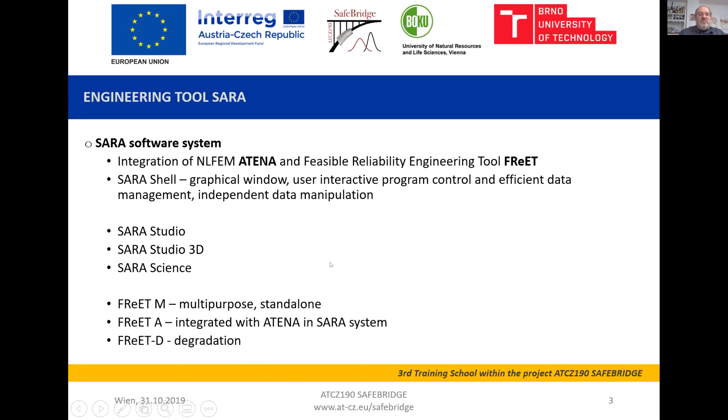So the main features of the SARA system are relatively friendly and simple-to-use integration, represented by the SARA Studio, of nonlinearity in civil engineering concrete structures, covered by ATENA, and advanced stochastic methods, concentrated in FReET. It enables us to account for randomness and uncertainty in the inputs for nonlinear calculation.

If we are using just ATENA itself, as I mentioned yesterday, we are in principle using deterministic calculation, and often our input parameters are only judged, so we are not sure about their quality, or they are in principle of random nature. But in deterministic analysis, we are not able to take this into account completely. We can maybe only set some limits like mean values or design values, but we don't have any idea about the stochastics or quality of the result. And therefore, the system should add exactly this dimension to the calculation.

The principle is randomization of input parameters. It is focused mainly on material, especially concrete properties, and the correlation among them. It could be used at the level of so-called random variables, which is the basic level that generates multiple samples. And each sample itself has clearly defined particular material properties or parameters.

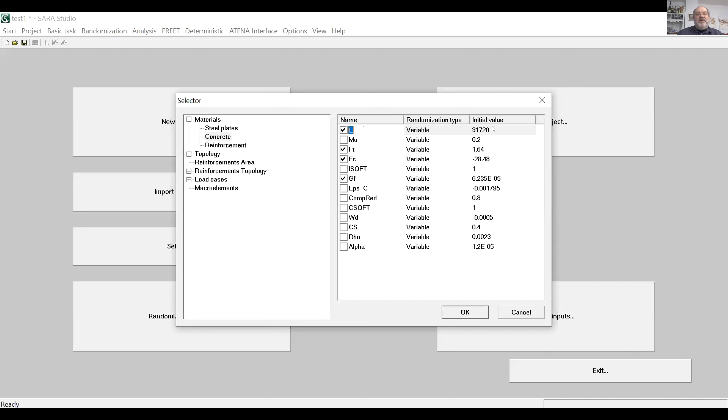And now, just for information, if you click on this variable, it could be changed to field, which will make the representation as random field. There are some more necessary actions, so I don't do it just now. I will return probably later if we have still time to show how to handle it. So at the moment, you have just to be careful to keep here everywhere variable, and you can already see on the right column the initial value, which is taken from the model. If you remember, probably you don't remember, but it was there in the basic task which we imported in this one, and will be used in FReET predefined as mean value. And you can see the list here on the right hand side. And if we confirm it now, we can start the randomization.

We have in principle two options: randomize materials or randomize the whole inputs. As soon as we randomized in the selector only the materials, all the others are switched off. If you take a look, there is nothing clicked. So as soon as you are limited to the randomization of materials, you can do this randomize materials. As soon as you do also randomization of something else, you have to use randomize inputs, which is not the same procedure. In this case, it's only update of materials. In this case, the complete input file is changed and randomized, which could bring sometimes certain problems. So this method of randomizing materials is more reliable, therefore should be used preferably if you randomize only materials.

So if we start the randomize materials, you will see now the screen of FReET. I am not pretty sure if you remember the demonstration of FReET software, which has been done by Professor Novák approximately 1 year ago. So I will probably repeat at least some basic information. So this is the main graphical screen, some alphanumerical table, and the tree of functions. And we have there at the moment active the random variables.

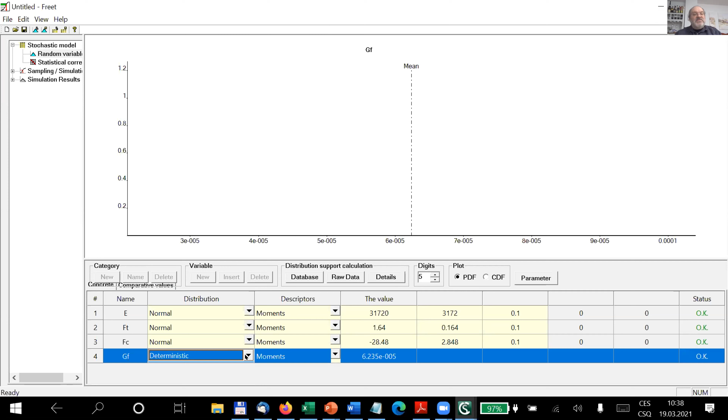The most simple way is to use the Gaussian normal distribution, but eventually we can use log normal, Weibull, or you can see here plenty of other distributions available depending on what you have, and eventually even you can use some kind of raw data and create a histogram distribution based on histogram. But as a basic, I will now employ the normal distribution.

This could be defined in different ways: by the mean value and coefficient of variation, or by some kind of extended parameters, or a combination of both, but the typical definition is by the moments.

The mean value could be changed eventually, but assuming our basic task has been created with the mean value, we will keep it. Only what we have to set up is the variability.

For modulus of elasticity, the variability as a default is 10% everywhere, and we can change it now to 5%. The tensile strength is rather unsure and variable, so we can put 15%. For compressive strength we can keep 10%, and for GF we could give something similar to tensile, like 12 or 20.

So now we have distributions, you can check a little bit what we did. For example, if we take the tensile strength, we have the mean value about 1.6 and something, but generated values will range approximately from 1 megapascal to over 2 megapascal. There will be several samples made in this region, similarly for all the other variables.

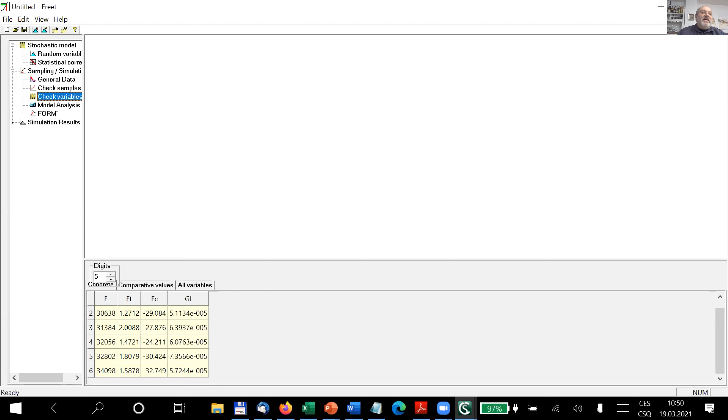As the next step is the model analysis. So if we go there, we are asked about starting model analysis, and if you do this function within the standard FReET, your functions which have been defined within FReET directly will be evaluated.

In case of SARA, it means that our samples will be generated. They will be collected somewhere in our directory, which has been created for our project, and will be started then by ATENA analysis. So now actually the samples should be generated.

There are these green squares, or green objects, which are the 6 samples, and now we can calculate them.

We can calculate them within the SARA system or outside. I hope I can show it on the screen. Do you see now my total commander? Does it work like this? Do you see the total commander? Yes, okay very well. So we have here in SARA the project which we created.

It was this test2, and here you can see the files task 1 to task 6, which are just input files for ATENA, and I can run them directly here as independent ATENA tasks, or even distribute them along, let's say, all computers in my laboratory and then collect the results.

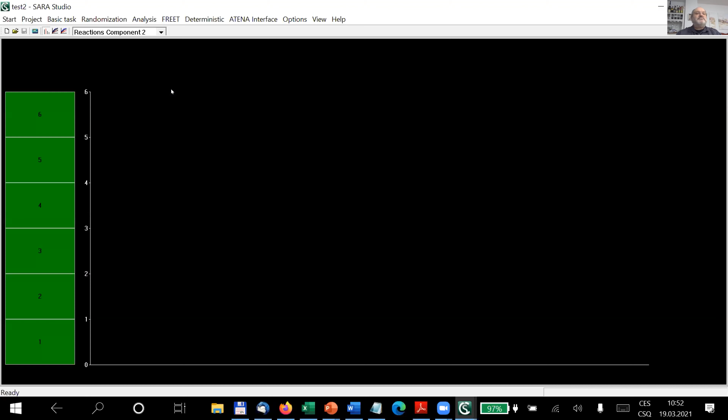So this is rather practical, but if we can go directly from SARA Studio, I will switch back to SARA Studio. Now I can go to the field analysis. It's not anymore this large scale buttons available, so we have to continue with the pull down menus, run analysis. And I can select either all of them or just some selected ones.

And if I start it, it will start the ATENA calculation in sequential way. So first of all, for the first task, I can follow it. I can see the load displacement diagram eventually if I would like to have it.

So displacement on the first axis, reaction on the second one, and this is our load displacement diagram. And eventually I can see also what happened with the model. So like this, I can enlarge everything, and we can see what happened in the analysis already during the calculation.

And now we are at the maximum. We have the failure, and our maximum in this case is about 90 kilonewton capacity of the reaction of the loading force actually. And now we have several more steps on the descending branch, and then okay, I leave it now.

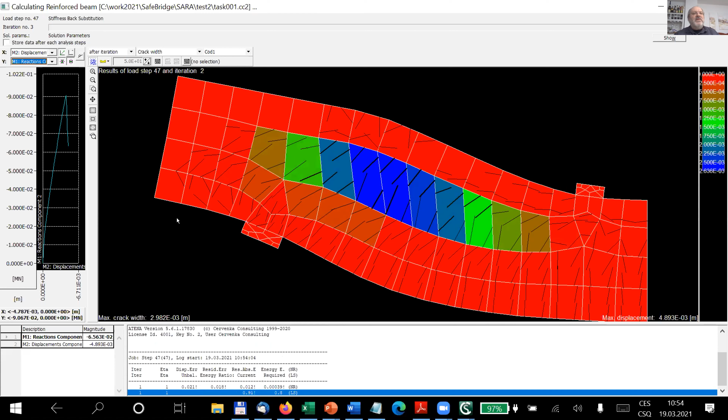Maybe I will switch off the graphics in order to a little bit increase the efficiency of calculation, since the graphics is taking certain capacity of the computer. And we have to have there a sufficient number of load steps even after peak, because the particular samples could have a little bit higher capacity than the original example, and we have to have still enough steps in order to go up to the maximum.

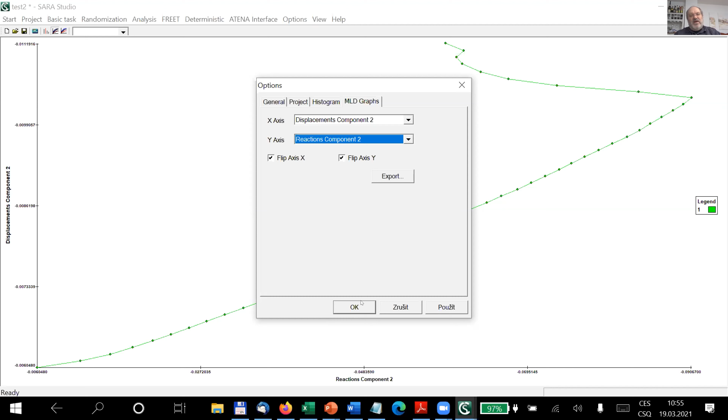And now the results will be the reaction component, which is actually our resistance, and will be combined here in some kind of relatively coarse histogram. But also we can see the load displacement curves, where we can set up the axis in options and MLD graphs, multi-load displacement diagrams, where we select displacement component on the x-axis and the reaction component on the y-axis. We can flip the axis because the values are in general negative in the definition, because we have the loading and the reaction going against the axis.

And we can switch back to the histograms, where we have now these two values, and we will see how the other samples will fit in this part. We can also set up here the scale of the axis, again in options and histogram, and we can select here automatic setup of the axis, and we can also select which one from the monitoring points would be evaluated. This is the important thing I mentioned yesterday.

It is decisive for SARA which values we set to the monitor, because the monitors are automatically transferred to SARA and later on also to FReET. And we have here two monitors, displacement component and reaction component, which represents actually the force which acts on our beam from the top as a reaction to the prescribed deformation. So the reaction component will represent actually the carrying capacity. So our setting is okay. We can leave the automatic setup, and we can take a look at the load displacement diagrams.

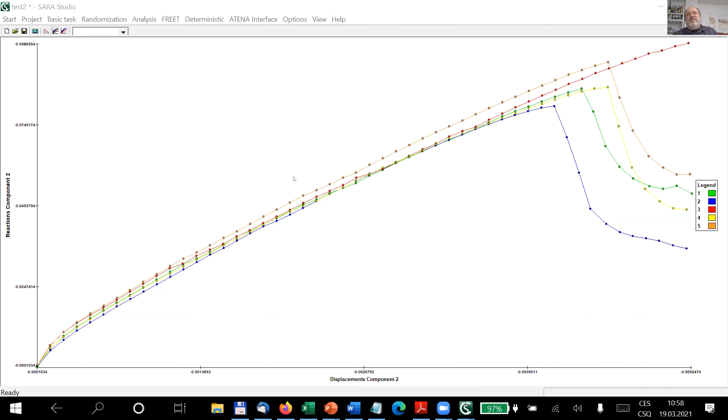And we will have to wait shortly until all the samples are calculated, because for the evaluation in FReET, we need to have all results. Otherwise, the stochastics will not be representative. So we can check again how far the calculation number 5 is. So it's just finished, and it's added to the set. Number 5 is the orange one, and now it's going to number 6. So in some minutes we have all of them. You can see if we keep the graphics off and the finite element mesh is rather coarse, the calculation is going fast.

But as soon as you make this kind of analysis of some complex example, it can take even days or weeks until you calculate, if you have 30 or even more samples, until you collect all the results. Therefore, it is meaningful to distribute the particular samples or particular files in parallel over several computers and collect the results.

The results you can collect in the analysis. First of all, you can break the analysis using this finish command, or you can also import the whole task or just the monitors, depending on whether you do it in the local or some extensive network. So you import the results from other computers directly to the SARA system.

And now we have our 6 samples ready. So we see here the load displacement diagram, and we see here also the coarse histogram of the results. So number 6 is somewhere in the middle, and the others are around. So it's some kind of very coarse normal distribution, let's say. And now we can go to evaluation.

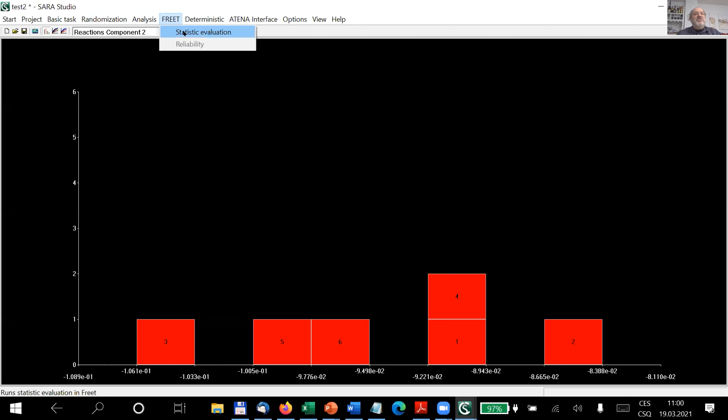So we go to FReET, which is the next tree, before we used this pull-down menu analysis. And the next one is menu FReET, which shows the statistical evaluation of the results. So now we are back in FReET, and we can go to the last position, before we managed this sampling from the beginning, where we defined and checked the data, and then did this model analysis. And now we go to the last position, which is simulation results, and we can see as a first point the histogram, for both reaction components and the displacement components for both monitors.

And we can set up here the number of classes, and what we see is the mean value and variability. So the mean value of our resistance is about 94 kilonewton, 0.094 in meganewton, and variability is about 7%. So variability of our inputs was, let's say, between 5 and 20%, and the result is about 7.

So we can exactly check this sensitivity, and we can see, if we relate the particular input variables to the reaction component, that the largest sensitivity is for tensile strength, which we could somehow expect, almost 80%. And you can see again, I will switch on the numbering to see it better, for which example which value has been achieved. So there is a certain strong correlation between tensile strength and the resulting resistance of the beam. Then about 50% regards modulus of elasticity, which is a little bit questionable.

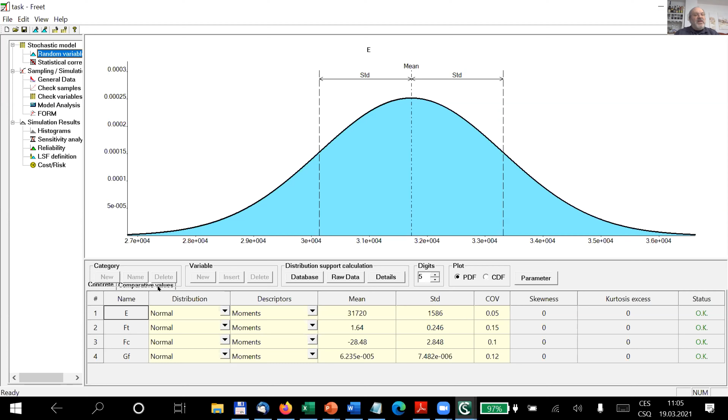So this load was actually evaluated as a result from the resistance side. And now we need some kind of loading on the action side. So we go, you can see it here, probably not so very well, but it's written there: comparative value. And we have to define this comparative value.

So we define a new variable, which could be deterministic or could have some distribution. I will put there the normal distribution. We can call it, for example, action or loading or whatever you want. And if we define it as a normal distribution, we can give there the mean value. Be careful, the units should be the same as in resistance, so 0.0 something.

And we had before the mean value was 94 kilonewton and the minimum was about 75. So the mean value of this one should be much less. So let's take 50 kilonewton. And the variability, it's a question how much we take, but definitely it should be some decimal numbers. So let's say 10% may be feasible.

So now we have the action, which will go from 35 kilonewton to about 65 with a mean value of 50. And now here at about 75 starts our resistance. Well, and we will now combine it. But in order to get the overlapping or the convolution of these two functions, we first of all have to make also sampling of this added

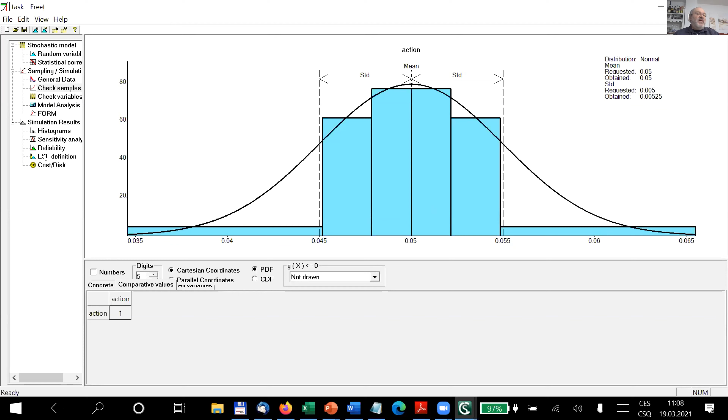We will run it now, and we will get, similarly like before, some kind of values, and we have here in addition these comparative values which are sampled in this way. So we have there again 6 samples which are somehow distributed within our distribution function. And now we have to define our limit state function. The limit state function says how these two functions, the resistance and this action, are combined together. So we define a new limit state function. We can keep the name limit state function 1, and it's already prepared here.

So what is usual and obvious is that we have to make the difference between the reaction component, which is resistance, we can rename it if we like, and we subtract the action. So it will represent something like the very coarse graphical representation in the upper picture. And now if we evaluate this limit state function, we can go again to the reliability, and you can see we have in addition one more line which represents this limit state function. It's a certain distribution, which is exactly this subtraction of these two functions.

And what is important here is the Cornell probability of failure. This is this column, and the Cornell beta index, which has been evaluated based on certain rules. And we see that the failure probability is here about 6 times 10 exponent minus 6, so about 6 to 1 million, and the corresponding Cornell beta index is 4.3.

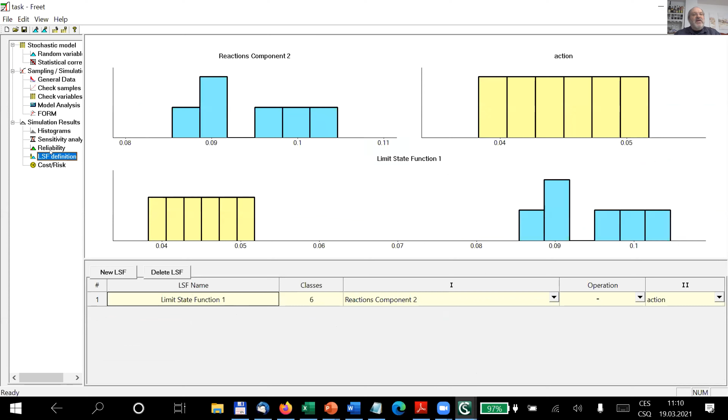And again, sample the comparative values. Our limit state function is already defined, so we don't need to redefine it, and we go directly to reliability. And now we have the failure probability about 2 multiplied by 10 to minus 7, and our Cornell index is 5, or slightly over 5, which is above the requested limits.

So in this way, we can move or define different values of this mean value and eventually variability of this comparative value, and then make some picture. I have it somewhere in some presentation, maybe I can try to show it and make such a diagram.

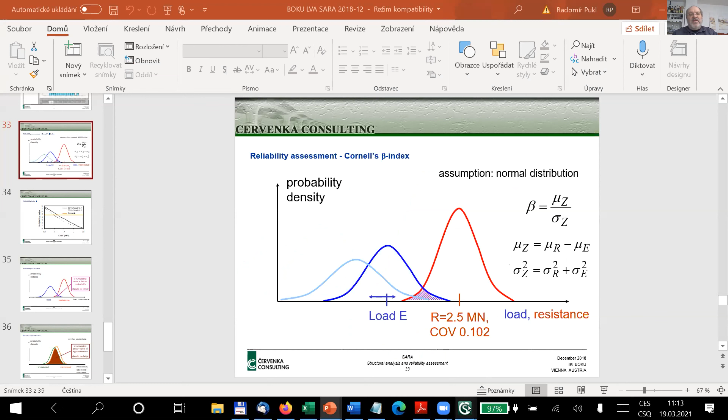It depends what we really need and what we would like to evaluate. Often it's enough if we just evaluate this resistance with the mean value and we are informed about the variability. It means the minimum and maximum, which is given here in the histogram. So this is from our samples, the maximum and minimum, the range, yeah? And eventually, if we then in the reliability evaluation set up the appropriate distribution like normal, what are the limits which are shown in the stochastic evaluation, which is based on the mean value and variability and type of distribution function.

Well, and more or less the same results we can receive now, also taking into account the spatial variability of the material in the samples. How to proceed? As a first, we have to adjust a little bit our basic task. So at the moment, we use the basic task, which had just the material concrete, which has been applied to the main macro element, which represents the specimen. It has been done from concrete, and therefore each of the samples had also concrete here, but with slightly different material properties, which were defined by this randomization. Well, these values have been in each of our 6 samples slightly different.

We can check it. I go fast to test 2, and I will open, for example, task number 2, and you can see that if we go to the material and concrete, we have there different compressive strengths, different tensile, different modules of elasticity in comparison to the other one where we have 31 gigapascal and 2.8, and this one we have 2.9 and 30.6. Well, but these values have been applied for the whole model. So the complete beam had these different properties, and task number 3 had again other ones, and so on.

Well, so now we do something slightly else. So we will define one additional material. This is this one which I promised yesterday to show you. The last one in the choice of materials, if we make the addition of material, is material with random fields. If we activate this material, we have there to define, first of all, the basic material, which will be our concrete, because we will somehow randomize our basic concrete properties. And then there will be added here some special file, which will be defined by FReET, and will describe the random field distribution for the selected material properties. At the moment, we don't have any, so we leave it just empty, and we will confirm that.

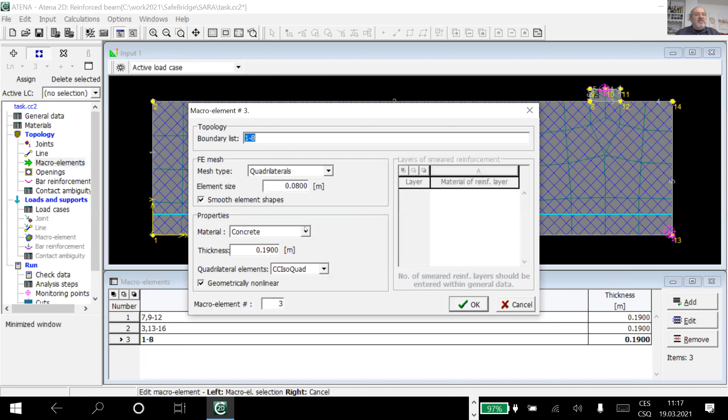But what we have to do now: we applied at the moment still the concrete. You can see this used for the main specimen, and this material with random field is not yet applied. So we have to go to macro element and edit our macro element in such a way that it is not made from concrete, but from this material with random fields. So now if we check it in material, our material of random fields is used once, and the concrete is not directly used, but it is used indirectly, because if we see this material with random fields, this concrete is here inside. So it's actually some kind of envelope for this material concrete which is applied.

And if we now perform the deterministic calculation with this new example, it will give the same results as before with concrete directly, because we don't have there any randomization file. Well, but we will save it under a new name.

Save as, and it will be task, but underscore random fields, because we defined there this material for random fields. So this is one necessary step. All other things remain the same. We have there the monitors, we have there the loading procedure, everything like before.

And now we will go out of this file. We could eventually check if it runs properly and so on, but hopefully it will go well. And we go again in the SARA system. So at the moment we have there under evaluation our old task, so we will close it. And we start again the SARA Studio. We check if we are in the proper directory, we do.

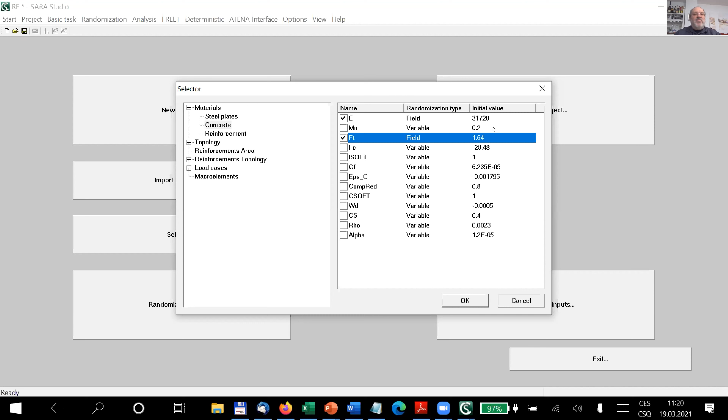And now, important step, we switched from variables to random fields. We can also keep the variables and calculate it as before, but it is not the sense. The sense was to apply the fields. So you see, nothing else changed. Only we prepared this basic input file and we changed now from random variables to random fields. The mean values and everything else stays the same.

And if we confirm it and go to randomizing materials, we will get there, you see, an additional option, additional possibility, which means random fields. In random variables, at the moment, we don't have any variable because we didn't define any. In general, it could be possible to combine random variables and random fields, but it's a slightly questionable operation. So better is to keep, let's say, pure randomization in variables or in fields. But in random fields, we do have our two variables which we selected.

These random fields which are currently used in FReET are based on Gaussian distribution. It cannot be changed, and it doesn't include correlation. So you can make it only just by setting some basic parameters, but you cannot influence the, let's say, stochastical details that are fixed for each sampling. So the mean value is there. In principle, again, it could be changed, but should be corresponding to what we prepared in advance. And we can change the variability.

So again, we could reduce it a little bit, 0.05 for modulus of elasticity, and enlarge it, let's say, for the tensile strength. And then we have here also values which are described like dx and dy and eventually dz for the so-called autocorrelation function, which means how strongly the corresponding variable will be varied over the volume. So in which length the same value will repeat, and in between there will be some kind of disturbances or changes.

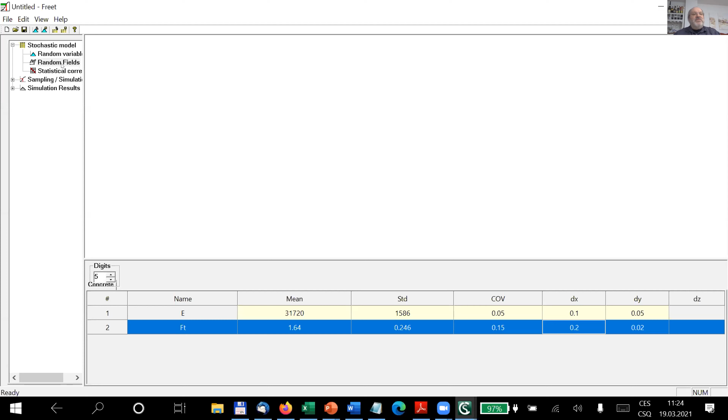By the way, actually, these random fields could be activated only in this FReET, which is related to SARA and ATENA, because it needs also geometrical information about the specimens we are working with. And if you are just using the standalone FReET, you don't have there any specimen, any geometrical object. So these random fields cannot be used in the standalone FReET, only in the SARA system in this specific FReET. Well, so as I mentioned, the stochastical correlation, we cannot input this, only related to the random variables.

And now we go again to sampling, and we can put again, let's say, these 6 samples, or however we like to do. The other parameters don't have too much influence here, and we can run the sampling. And now we can check again fields, additional value, where we see here for the particular 6 simulations the shape of the fields, but the graphics here is not, let's say, excellent, just very informative. We will see it a little bit better later on in ATENA models. And we can continue to the model analysis, which is like before.

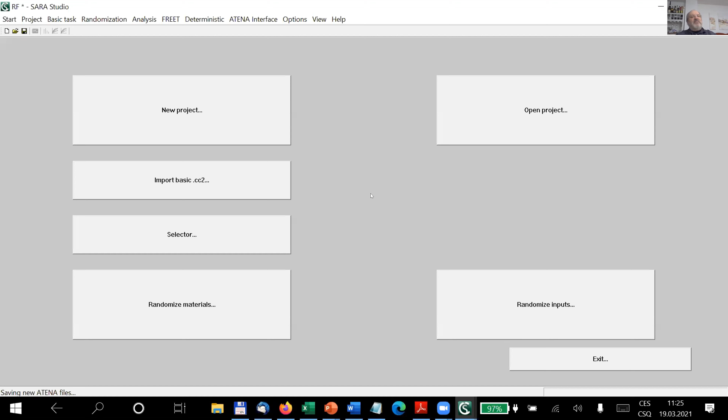Just starting the generating of the samples. It takes a little bit of time because preparation of the files is a little bit complicated, and we can start again the analysis. I will run just only one maybe for the beginning, or maybe we can leave all 6. We will see how long it takes and if it runs, and eventually we will in between do something else. So let's run it, and we can check how it works in the particular case.

So we set up again the load displacement diagram. It's going relatively fast, and we can eventually check what happened in the specimen.

So you see it's a relatively similar picture like before in the variables. And we will also receive in short the load displacement diagram, which corresponds to that. But what will be important is to check how the interpretation of the material variables is distributed. So we are over the top, going into the descending branch.

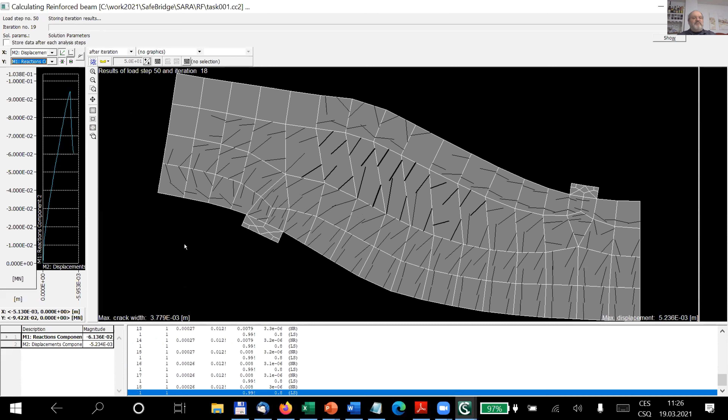In principle, you have seen the handling of the random fields is more or less the same as handling of the random variables. It should only be applied to, let's say, volumetric materials like concrete. There's a limitation that you have to use this Gaussian distribution, and you have to judge properly the autocorrelation lengths. So now we can set the load displacement diagrams to have the appropriate form, displacement and reaction.

Okay, so you see it's like before. What is now interesting is we can check what happened actually in the calculation. So we have here the test random field, somewhere random field.

Could you still hear me and see everything? Could you confirm it? It's okay, yeah.

Everything okay, huh? So if we have this task number 1, which is already calculated, we can open it. It's an additional feature, let's say, when we make the calculations in the SARA system, that we have the input file and we also have the result of every one of the samples, and we can check it like a normal deterministic ATENA calculation. As I mentioned before, for the previous study, we could increase several load steps and continue the calculation to go over the peak and so on.

And now we can open the results from the first calculation, and we can go to post-processing, which is a story we didn't touch yesterday, but you have to check it in the cloud system. If we go even in the first step, we will evaluate the scalars.

And now I hope in between we have already calculated the second task, even the fourth task. So if we open number 3, for example, just for comparison, again we go to post-processing, we select in scalars the option random fields, and for example this FT.

We have such a distribution in a similar range, but different configurations. So now we can compare these two fields for FT from sample 1 and sample 3. You see, it's different.

And also, if we go now back to the SARA Studio, we have not much, but different load displacement diagrams as a response. We have in between four already calculated samples, and in this course histogram, you can see also again it creates something which is similar to the normal distribution.

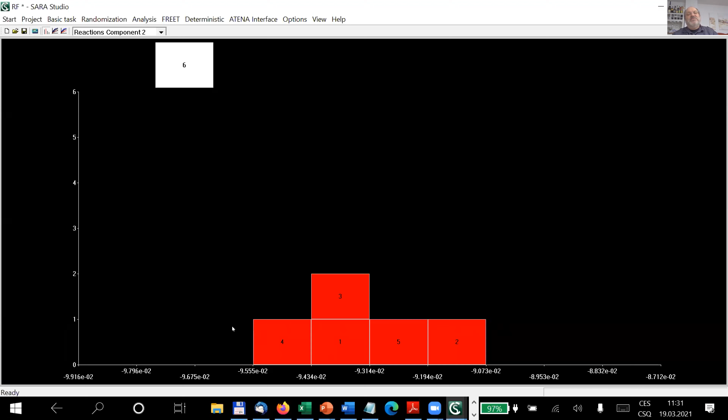We can wait shortly until the last sample is calculated, and then we can go to the evaluation and continue the evaluation in FReET, more or less in the same way as we did before, but here it's not so obvious.

But if we have some sample which will have certain parts of regular stress or strain distribution, and if we do the sampling in random variables, we will get the damage picture or the crack pattern very similar, only with different maximum load or different cracking load for each sample.

But if we apply these random fields, we will get really different crack patterns because of this distribution, so volumetric or spatial distribution of the material parameters.

And especially if we would like to evaluate, for example, shrinkage, which is regularly distributed over a certain area, this could be a very realistic way how to evaluate or how to receive results which are similar to the measured values. So you don't get such a calculation with deterministic and even not with random variables.

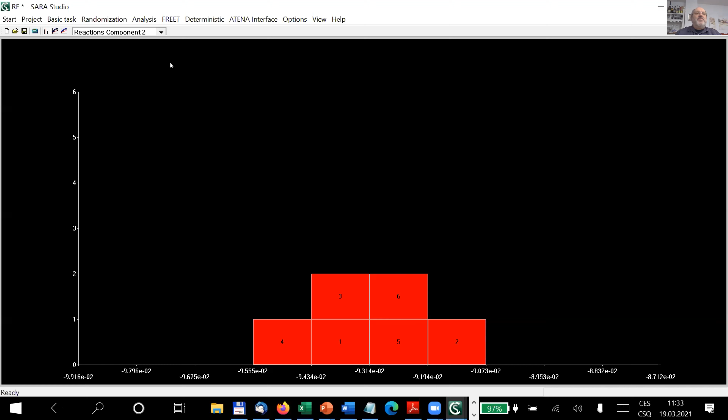Well, I think we don't need to evaluate the random field sample again, we did it before. In the random variables, you can see here the results are a little bit more nearby. We have only 2 variables, therefore probably it's a little bit better stochastical approach. Let's check it in FReET, how we are there.

So we go to the results, we go directly to the reliability, and we can set the normal distribution, which looks like this. So our mean value is again 93, before it was 94, but the range is now only from 90 to about 96.

So we are in a more narrow band. Okay, so far how does it work? How you can use it? There are plenty of details which we could discuss, but I am not pretty sure if it is meaningful if you cannot try it.

What's important, I have shown yesterday, there is also available documentation for the SARA Studio for both levels, of engineering and science. It could be reached either on the computer with installed ATENA and SARA, or it could be downloaded from our web page.

And then I will recommend also, if you are interested in that, to try this, to follow this procedure and this simple example, to try it on your own and to become familiar with this methodology, and to manage it and master it.

Okay, do you see it now? The input preprocessor of ATENA 2D. Do you see it? Yes.

Well, so I can move, for example, this point I have shown in the SARA system that you can change or randomize joints. So I will randomize joint coordinates, and I can move this one yellow joint in certain ranges. Some random changes in geometry, and then the whole system will again generate the corresponding shape. The finite element mesh will be generated for the new shape, and the calculation will be performed.

However, in the input file, these yellow joints are not there. There are all these nodal points of the finite elements. So if you would like to make some geometrical changes, you have to make some correlated change of all these nodal points to represent the same geometry, and then actually your finite elements will be not regular, because only the upper row will be changed and the other will remain until you change them as well. So from this point of view, it's a certain disadvantage, which in case of material randomization is not important, but in case of some other types of randomization could be a problem.

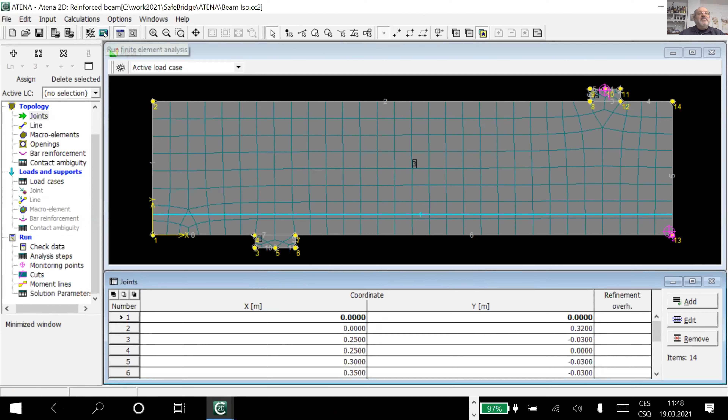So what happens if you start the calculation? Maybe the majority of you knows already, but maybe some of you didn't do it yet. So here is the button for running finite element analysis. And now you can already in advance set up the load displacement diagram axes. It is possible only in ATENA 2D. If you use ATENA Engineering 3D or ATENA Science, you have to let it calculate shortly in order to accept the values, and afterwards you can set up the load displacement diagram.

And you can eventually set here which results will be saved and analyzed or not. You can eventually do some saving after several steps and so on. But recently, especially in 2D, it's no problem to save everything. And now we start the analysis. And this is the screen you have seen already before in the ATENA system. I will pause it now and explain a little bit what we have there.

So we have the main graphical field where the structure is shown as a basic without any additional information, only the shape with finite element mesh. On the left hand side, we have the load displacement diagram, so it has been set, or we can change it or set it now, what is on which axis. On the x-axis we have the displacement, this is the deflection here, and on the vertical axis we have the reaction component, which is the reaction against our deformation, which we apply in this point.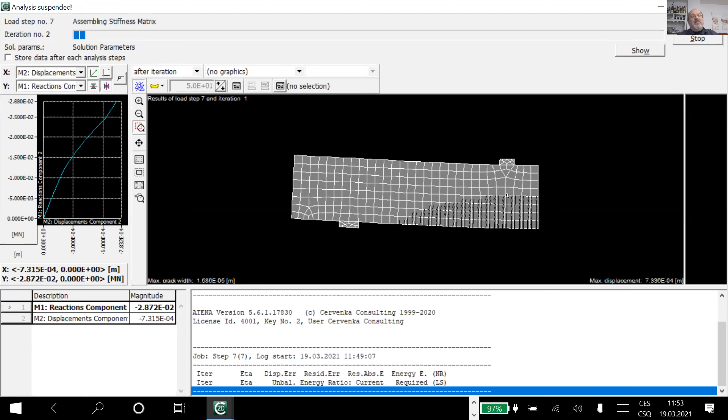We can switch on or off the finite element mesh in order to see nicer the damage based on the cracking. And you can see now, if I switch again the finite element mesh, and I will maybe enlarge it a little bit, the manipulation, enlarging, and setting is similar like in pre and post processor.

These cracks are reproduced in integration points. On each finite element, we have 4 integration points, and here there are 4 lines on every finite element to show the actual situation in the particular finite element. For example, here you can see there are 3 cracks in 3 integration points, material points, but the last one is still undamaged. In the post-processing, usually we show cracks just per finite element, which is often nicer just for the graphical representation.

We can also scale or not scale the deformation. So it's undeformed or deformed, and the deformation could be increased or minimized, or we can give directly the number. We can also filter the cracks. This is the last option.

What you see on the screen at the moment is the maximum displacement; we are in load step 7, so the maximum is about 0.7 of a millimeter, because we are adding 1/10 of a millimeter per step. And we can see here also the maximum crack width, which is at the moment just 1 multiplied by 10 to the minus 5 or 6 or something like that. So we can say the minimum width to be shown would be 1 exponent minus 6.

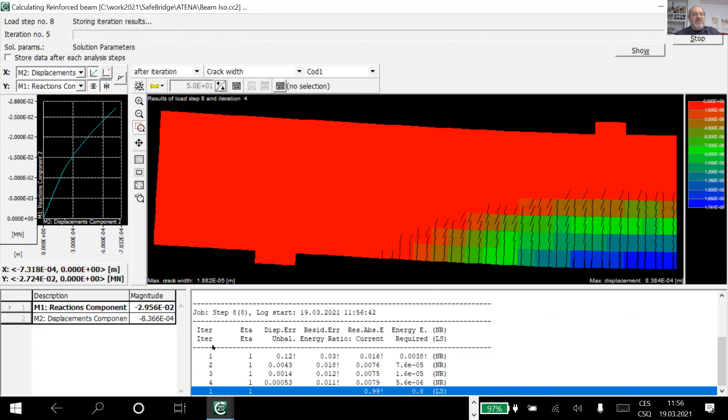And you can see in just several iterations, 3 before, now it's going a little bit more. 21 iterations, and then it will converge. I will try to stop it. Not successful now. So you can see in the values this sign means not converged. As soon as we achieve 1% everywhere, it is converged in all columns. The columns represent the particular criteria which we defined in the solution method.

So it's the error in displacement, error in residual forces, the absolute maximum residual force, and the energy. And then we have 1% for the first 3 and 1% squared in the last column. And this is the iteration procedure, and you can see that in 6 iterations, while we are still on the ascending branch, we achieved the equilibrium. And the development of cracks you can see in the main picture.

And if we continue again, the convergence is relatively good. If it is not so good, so if we go until the maximum iterations, we have to make shorter load steps. You see, in some cases the iteration process is longer because there is some redistribution of stresses by new cracks.

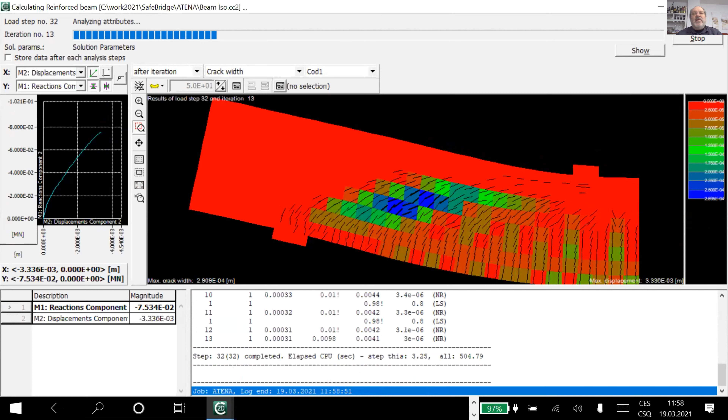We can again make the filtering to reduce. We can put there, for example, 0.0001. And you see the bending cracks are already smaller than our limit, but the shear cracks are increasing.

By the way, if we switch on the graphics, our calculation is much more demanding on the processor, and it will be slower. So if you would like to calculate efficiently, we have to switch off the graphics if we don't actually watch it. In this small example it plays not so much role, but in a larger example it is important.

And now we are already on the descending branch. You can see the crack is localized strongly, and we don't achieve the equilibrium until the last iteration. We have, I think, 60 iterations. I will pause it again.

And you can see we have still there, in forces and maximum forces, about 4–5%, here 2% unequilibrium, which is not much, so we can still continue, but we don't achieve the convergence, and we go to the last iteration before we continue to the next increment. It's still a stable solution. It's just only some exceeding remaining forces on the cracks which are now open.

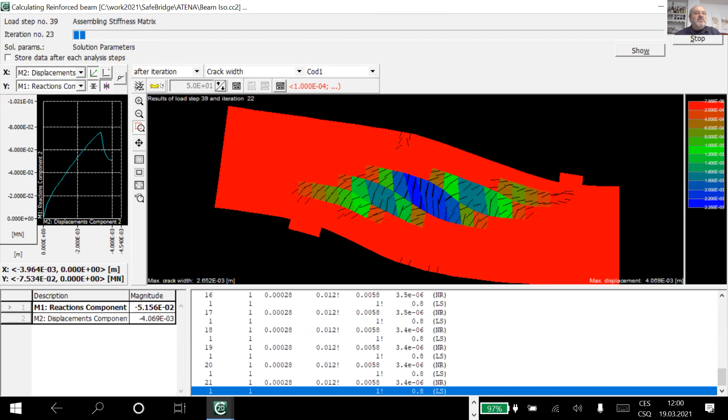We can maybe switch off the deformation scaling. So now we have the undeformed state. You can see here some additional crack which appears in the upper part, maybe some compressive failure which could happen below the loading plate and so on. And we will be okay.

We can stop the calculation because we have already the descending branch. Stopping immediately is possible if you are sure you will not continue. After iteration is better, because you can repeat or continue the step if you decide you would like to continue. But the best solution for such a small example is after the load step.

For a large example, and especially with strong divergence, which could happen especially with materials of the cementitious type, not in the SBETA material, but in the cementitious ones, they could have some internal problems with convergence in the descending branch. Then it could still take a long time until the end of the step. But now it's efficient to do it like this. We have a regular end of the calculation, and we can eventually continue if we like.

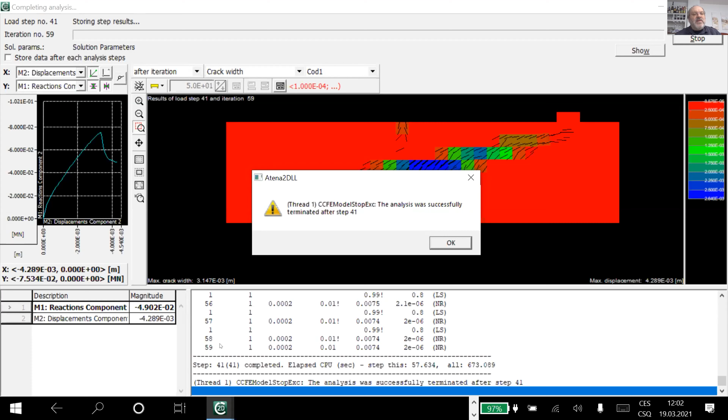Everything is stored and everything is regular, and we even have a converged state in the one iteration before the maximum, but it converged. You see, we no longer have this sign in the last line, and we have the number 59 in the last iteration.

Okay, and now we go to the post-processing, and there we can select the corresponding load step, and in the last one, for example, show the cracks. We have here a choice about what we would like to see. We say cracks in elements, because, as I mentioned, integration points have been shown during the real time. So we go to the elements.

You can see them. You can eventually label them. You can label crack width, you can label remaining stresses and so on. And you can also make the filtering. The maximum crack, in this case, since we are on the descending branch, is 2.5 millimeters. So we can make the filtering, for example, again for 1/10 of a millimeter. So all these are over 1/10 of a millimeter.

And if we label them, we will see that we have to enlarge it a little bit. Then here in the middle, we have these cracks, which are about 2.6 millimeters.

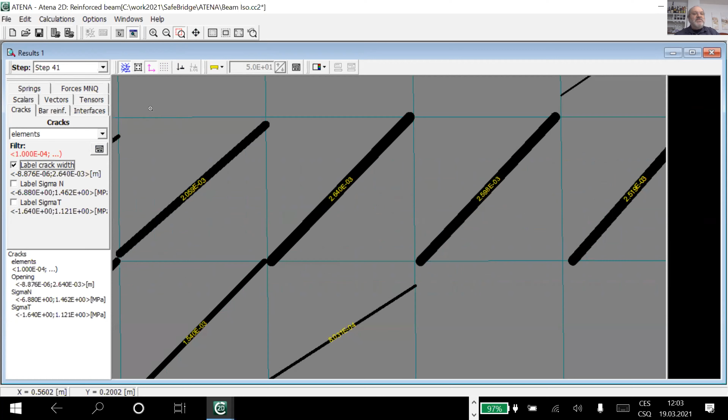Well, so for evaluation, the cracks are important, and also maybe some other values, but what is less interesting are stresses, because if you remember, if we check the definition of the concrete material, the stresses go up and again down. So if you follow the stresses on the descending branch, they will actually diminish in the damaged region. So they don't say anything, and you don't know if you are on the ascending or descending branch.

But in contradiction, if you take care about strains, they are still increasing. After cracking, after reaching tensile strength, they represent more or less cracks. Before, they represent the increment of the stressing of the material. So it will be much more instructive to see strains than stresses.

And you can evaluate also different things like stress in the reinforcement, distribution, you can make sections and so on, but we are out of time, so I don't go into details. Something you can see in the tutorial part post-processing, and something else you can investigate on your own. You have here scalars, vectors, tensors, engineering forces, the evaluation of springs, interfaces, bar reinforcement, and so on. And you will see here in the setup what everything is available.

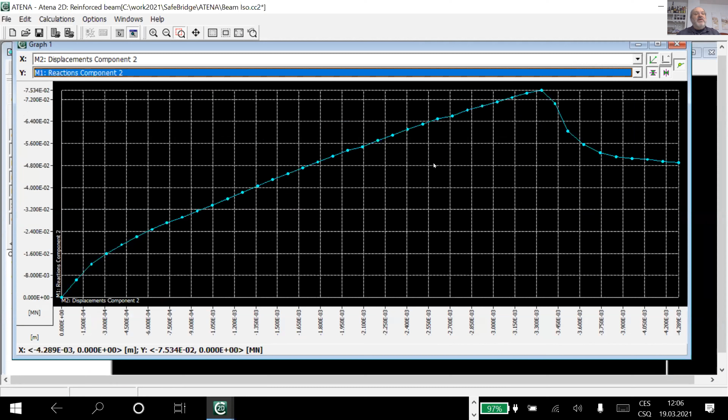You can open here a window with graph, and you can see there our load displacement diagram. But if you would like to compare, for example, more alternatives or compare with experiments and so on, it's more flexible to transfer this set of values or these two sets of values or even more to Excel and evaluate it there. In ATENA Science, there is already some function which allows you to export the load displacement diagram in graphics or in numbers. And then if you export it in numbers, you can open it in Excel.

So then again, here you can manipulate it in the same way like in the real time. For the first approximation it is sufficient, but for the comparison not anymore. If you would like to check a certain load step, you can set up here in the x-axis step iteration, and then you can see, for example, the maximum has been achieved in load step 32, and then you can go back to the step selection. You can check what happened in load step 32, one step before, one step after, how the curve developed, and so on. Well, so with this, I would like to finish.

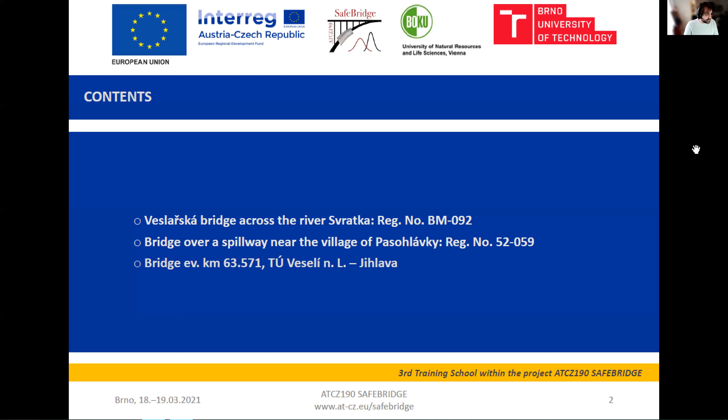Okay, so I wasn't here in the first part of the training school, so let me introduce myself. My name is Lukáš Novák, and I'm from the Institute of Structural Mechanics, Faculty of Civil Engineering, Brno University of Technology. And I prepared this presentation in cooperation with my supervisor, Professor Drahomír Novák.

Today, you have seen several presentations focused on comparison between nonlinear analysis and classical analysis, and some, let's say, beneficial employment of nonlinear analysis and probabilistic analysis. And in this really last part of the training school, we will apply these methods.

First application is Veslařská bridge across the river Svratka, and it's a bridge built in 1966. It has 3 spans, and its total length is 63 meters. Total width of the bridge is 16.6 meters. Free span length is 50 meters. Free width of the bridge is 16 meters, and span length of superstructures 53.5 meters. You can see a figure of this bridge on the right-hand side of the presentation.

Some technical details. This bridge has 3 spans, and each span works from static behavior as a simple beam. Superstructure consists of 16 precast post-tensioned girders of type KA61, which are not transversally prestressed, so they work as simple beams as well. And the end span is 15.8 meters long, so it means these girders were shortened. And on the other hand, in the mid-span, they are almost 20 meters long, so they were a little bit extended.

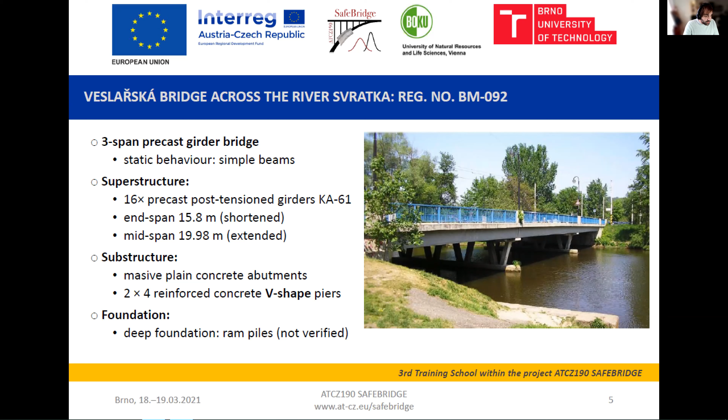So for our work, as you already know, we need a lot of information, because we need to develop a really accurate mathematical model. Our sources for development of the numerical model of this bridge: we had original bridge documentation, routine inspection protocols, general inspection protocols, of course, documentation of precast girders KA61, and a very valuable source was the construction diary, including results of material experiments. And finally, we got also a diagnostic survey, which will be really helpful during the model configuration process.

Our task was development of a mathematical model representing the real behavior of the bridge, and statistical analysis of the mathematical model, which will be presented today, and also semi-probabilistic assessment of the bridge. I will speak just a few details about this point in the last slide of this presentation. And further work will be focused on the model configuration process.

So this slide is focused on a nonlinear finite element model. This was actually presented already during the last training school, so I will just give you a quick review of the main information, just to give you an image of what was done and what will be used for stochastic analysis.

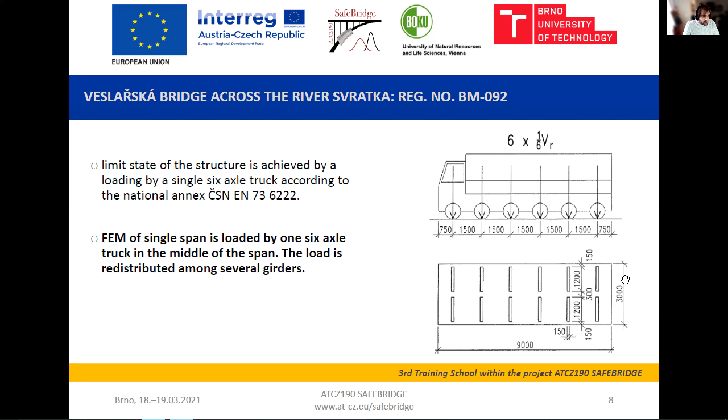It's quite interesting that this model consists of 250,000 elements, and therefore it takes 24 hours to calculate one simulation. So it's quite highly time-consuming.

Okay, once we had a ready deterministic model, it was possible to start stochastic analysis. If you start stochastic analysis, you need, in the first step, to decide what to use as your random variables. It means you need to define a stochastic model. In our case, we defined two random variables: compressive strength of concrete and pre-stressing force. I will speak some more details in the next slide about this point.

Then you need to decide actually what method should be used for your purpose. We needed to perform statistical analysis, so we used Latin hypercube sampling. Some details were presented during previous training schools, so I believe you are familiar with this method.

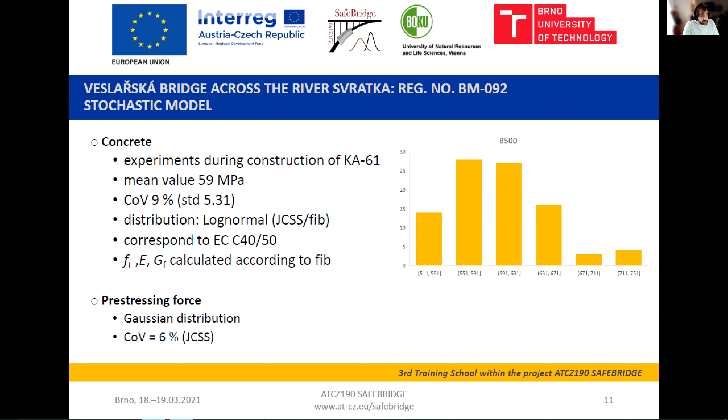If we look at the second quantity of interest, meaning the limit state of cracking, first occurrence of cracks, we have mean value of 716 tons and coefficient of variation 4.5%. Again, we assume log normal distribution.

And finally, ultimate limit state, meaning the load leading to failure of the structure. We have 792 tons and coefficient of variation 6.2%. Note that these are all mean values. These are not design values. The design values will be much lower.

Once we had these calculations and results of Latin hypercube sampling, we can also perform sensitivity analysis by correlation matrix. It's really simple—actually a byproduct of Latin hypercube sampling, and we do not need any other calculations. The process is really simple, you can do it in Excel. You just have input variables and your quantity of interest, and you can calculate statistical correlation coefficients among input random variables

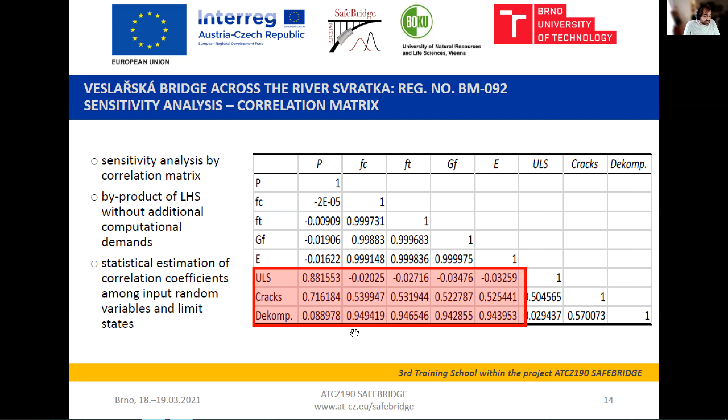So what we need to do is calculate the dynamic factor of load, delta, because we performed static analysis in ATENA, and therefore we need to determine some dynamic factor according to codes, and it will reduce our maximal loads.

Then we need to determine the target reliability index. It's well defined in Eurocodes, and it's dependent on the consequences of failure of the structure, design time, etc. So you can find tables in Eurocode and determine the target reliability index beta.

In our case, for ultimate limit state beta was equal to 3.8. For ultimate limit state of cracks, beta was equal to 1.5, and for decompression, beta was equal to 0.

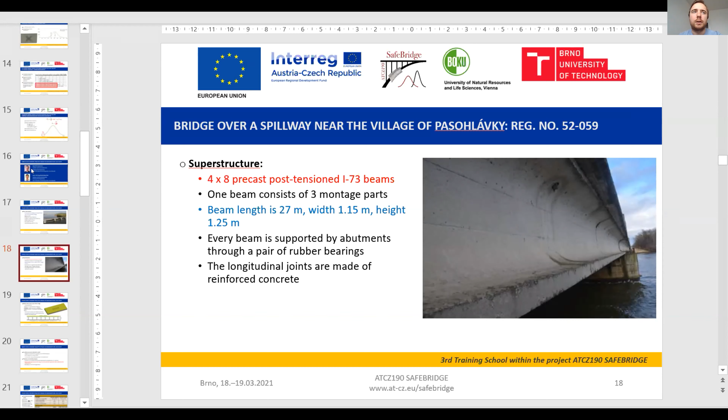Now we come to the part where we will talk about the nonlinear analysis of the whole bridge field. First, a single beam model was created and debugged. It is made of C50/60 class concrete, mild reinforcement, and 16 pre-stressing cables.

The beam model was further copied and provided with longitudinal joints made of reinforced concrete of C1250 strength class.

Furthermore, the model of the bridge field consists of road layer and loading plates. The load is considered according to the Czech standard as exclusive. The bridge field is loaded by a 6-axle vehicle in the middle of the bridge span. The created model of the whole bridge field is further used in the nonlinear reliability analysis.

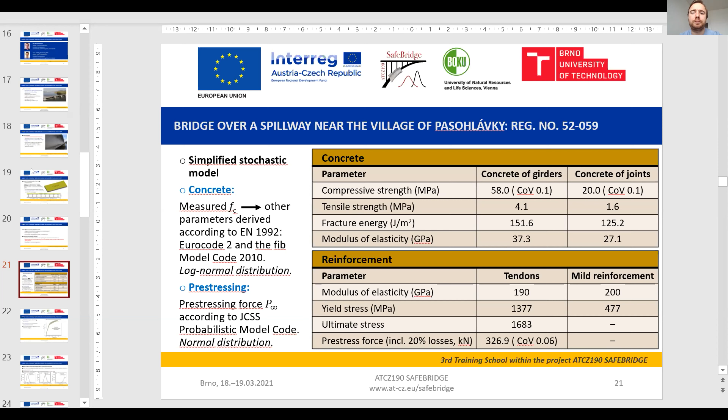Now the required response parameters are determined for each load diagram in the form of corresponding limit states. Limit state of decompression, limit state of crack initiation, and ultimate limit state were taken into account. The obtained data are further adjusted by the appropriate dynamic factor. For each limit state, the mean value, standard deviation, and coefficient of variation are calculated.

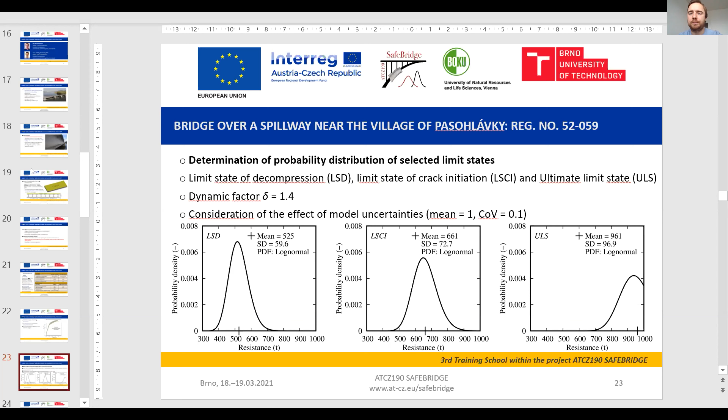At the end of the presentation, we get to the final results of the global design resistance of one bridge field of structure. We used code-recommended methods to assess the reliability. The first method is the probabilistic approach. This method is based on the results from the previous slide, when we worked with all 30 simulations.

Another method is the method according to EN 1992, which can be used only for the evaluation of the ultimate limit state, and it is based on the results of nonlinear simulation with the mean values. The third method is the ECoV method, for which two simulations are required: first with the mean values and second with the characteristic values.

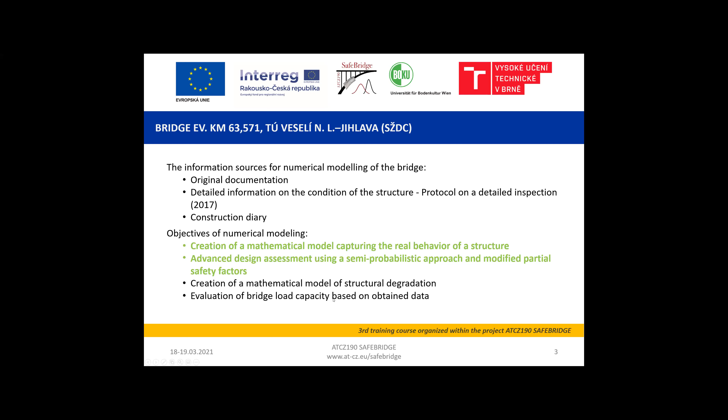So our objective was again to create a mathematical model which will capture the real behavior of the structure and to perform advanced design assessment using a semi-probabilistic approach and modified partial safety factors. Today, I will introduce a scope similar to the scope of Lukáš' work. The semi-probabilistic design is not directly performed yet, but I will show you the results of stochastic simulation and stochastic analysis. Our further goal will be to create a mathematical model which will also consider the structural degradation, and we would like to evaluate the current load-bearing capacity of the bridge at the end of the process.

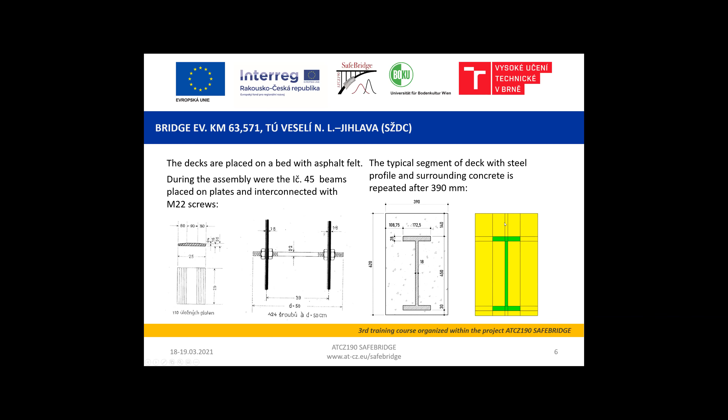The webs of the beams are connected together using bars and screws with a diameter of 2.2 centimeters. During the casting of the bridge, the beams were put on steel blocks. Here you can see the cross section of the typical segment, and we can see that the I-shaped steel beams repeat every 390 millimeters. And here is the geometry which was utilized to create the numerical models.

So as I mentioned, due to lack of information about the concrete grade, steel class and so on, we need to have some assumptions for numerical modeling. So we assume concrete class C8/10 with an average cubic strength of 15 megapascals. For steel, we assume the class S235.

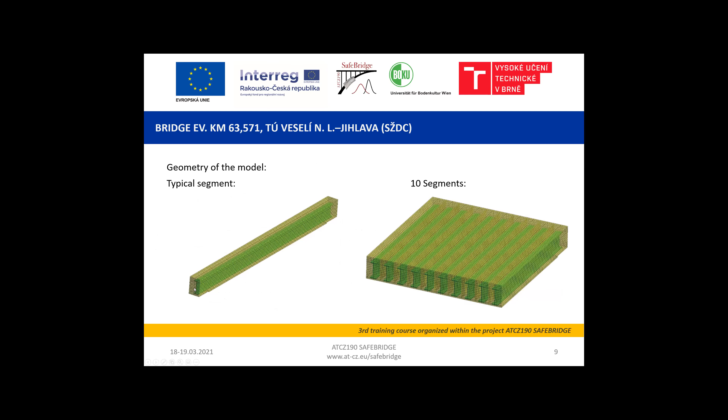We created several numerical models. A model of a 2D typical segment, which was then extruded into a 3D model. Then we created a 3D model of one typical segment, which was only one half of the whole beam, because we assume the symmetrical loading situation. Then we can perform some simplification and calculate just one half of a beam.

Then we created a 3D model of 10 typical segments of a beam. And we also created the 3D model for analysis of creep and shrinkage deformations. So as expected, the creep and shrinkage deformation is not very significant for this type of bridge and can be neglected, because the bridge itself is not pre-stressed, and shrinkage deformation over the 70 years of existence is actually quite small, so those cracks might be neglected.

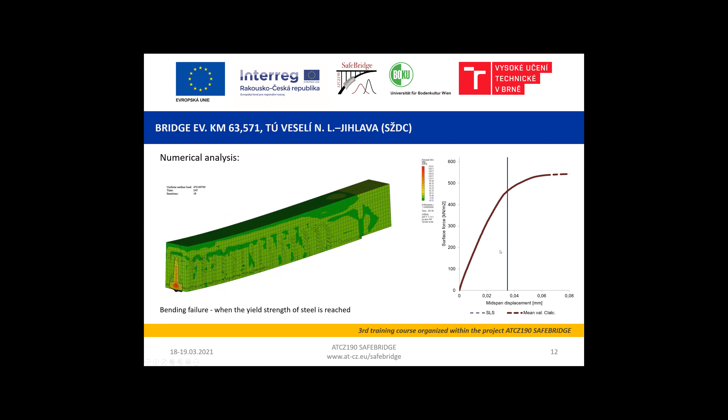As expected, the most decisive parameter of the analysis is, of course, the yield strength of the steel. The concrete itself helps just to distribute the loads, but for this type of construction, the steel is the most crucial factor. Here you can see the load deflection curve, calculated for a numerical model with mean values of material parameters assumed. Also here the serviceability limit state is marked, which corresponds to 35 millimeters according to Eurocode 2.

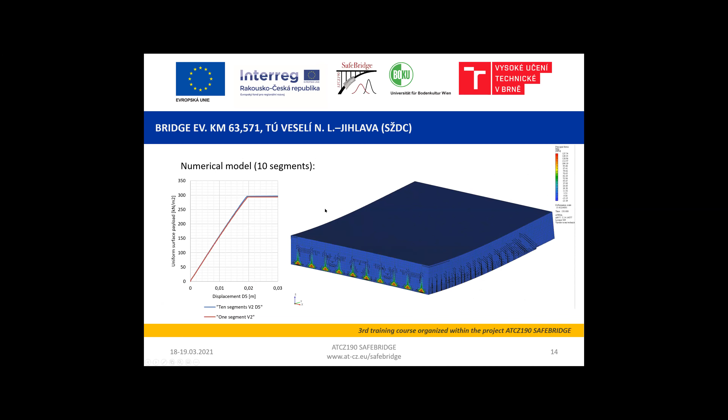We also compared the model with 10 segments and the model with 1 segment, just to see if we get some deformation not only in the longitudinal direction, but also in the opposite direction of the cross section. And we can see that the calculation is approximately the same. So we can work with just 1 typical segment. And the stochastic analysis, which followed the deterministic modeling, was therefore performed with just the 1 typical segment of the bridge.

So for the stochastic model, as Lukáš already described, we need to calculate the mean values of material parameters. So we can use model codes and some standard recommendations. Here you can see some relations from the FIB Model Code and the Joint Committee for Structural Safety, which can be used to calculate mean values of material parameters based on characteristic values, which are known. We also use a recommendation from the Joint Committee on Structural Safety to set up proper coefficients of variation of material parameters and distributions.

And Lukáš described that we can, for each simulation, calculate those parameters individually based on simulation of compressive strength. But we can also create a stochastic model where we describe completely the variability and corresponding probabilistic distributions, and perform simulations directly using this model, so we do not need to recalculate new material parameters for each simulation. So this is a more robust approach, but it's also high dimensional, and it might be computationally more extensive.

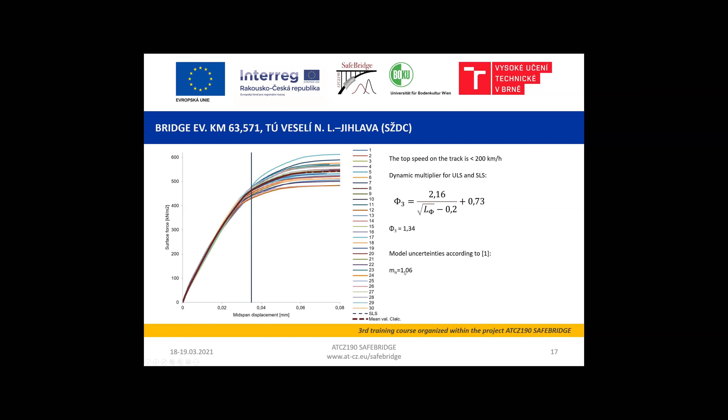So from the simulations, we directly get those values here for, let's say, load at serviceability limit state, which was 35 millimeters of midspan deflection for this bridge. And the second limit state we observed was load at ultimate limit state. It was load at the moment where yield strength of the steel was reached. So those are the corresponding values of, let's say, uniform loading, which needs to be applied on the bridge in order to achieve one of these limit states.

So at the bottom part of the table, you can see the mean values evaluated and the standard deviations, which correspond to those statistics. If we divide those values by the dynamic multiplier and also by model uncertainties, we can then get those values. And based on those values, we can use the procedure which was described at the beginning by Lukáš to obtain actually design values which we can use for our, let's say, final assessment of a bridge.

The last slides of my presentation show stochastic histograms of performed simulations along with the assumed log normal distribution, which is fitted to the data we have generated. And we can see that the mean value of serviceability limit state was 322 kilonewtons per square meter. The corresponding standard deviation was then 9.31 kilonewtons per square meter. And for ultimate limit state, we get capacity 381.52 kilonewtons per square meter, and the corresponding standard deviation was 21 kilonewtons per square meter.

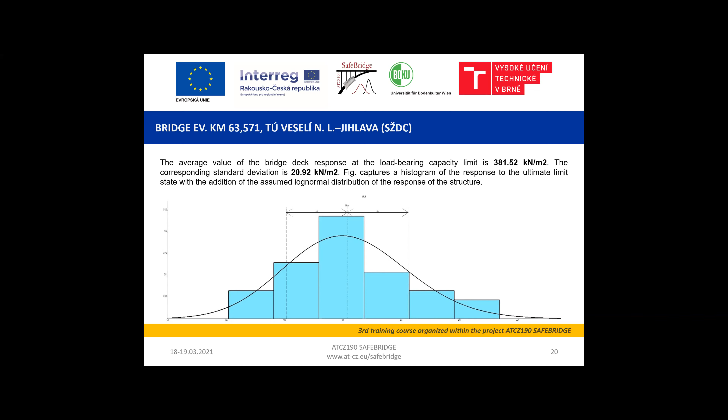Based on those data, we will evaluate the design values of both statistics for both limit states, and we will then proceed to analysis with the structure which will be somehow degraded. So we will also consider the current state of the construction, and at the end of, let's say, this work, we hopefully get an assessment of the current state of the bridge and current capacity.

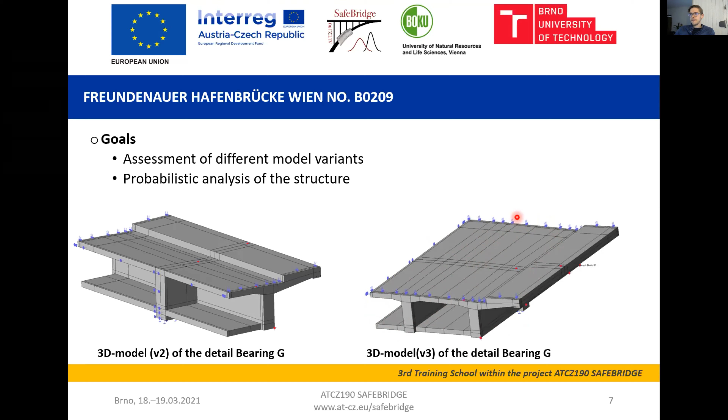Here the loading of the element with the second load case is shown, and we assumed the loading was eccentric according to Eurocode, load model 1. So the higher loading is where the traffic is, and the lower loading is on the outer beam where there are just pedestrian lanes. The loads were applied at the beginning and at the end, and the eccentricity because of the different lengths was also accounted for.

Different models are shown here. The colors correspond to each other. The blue versions are just the outer beams. The pink versions are the outer beam and the middle beam, but one beam is in concrete and one beam is in elastic material. And the green ones are outer beam and middle beam, but both beams were modeled in concrete. All this was done in ATENA and GiD, and these models were analyzed with SARA and Excel.

So our goal was to find a model that predicts it best, and we made a visual performance assessment of the different models. First the crack width. Here's model 3.2, and we analyzed it at 4 different load steps. First at step 80, that's about 40 to 50% of the corresponding characteristic load. The crack width was about 0.4 millimeters in this case, and we compared it to the other models. At around 100% of the characteristic load, the crack width is 1.1 millimeters.

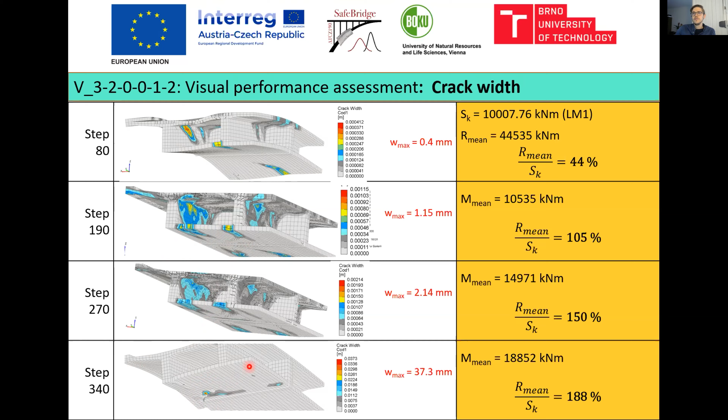We also looked at the stress of the reinforcement, and here you can see the same picture as with the cracks, as it corresponds. You can see the high shear stress on the model and the high stress on the lower reinforcement of the concrete slab.

One part was because the initial shear check in SOFiSTiK, according to today's load model, wasn't met, so we had to perform a more sophisticated approach. In the Austrian ONR 24008 there's the multi-level approach, and if the initial checks are not met, you can choose between different formats. For this bridge, the model for bars with bent reinforcement was selected. This model is based on the model of the potential shear force crack.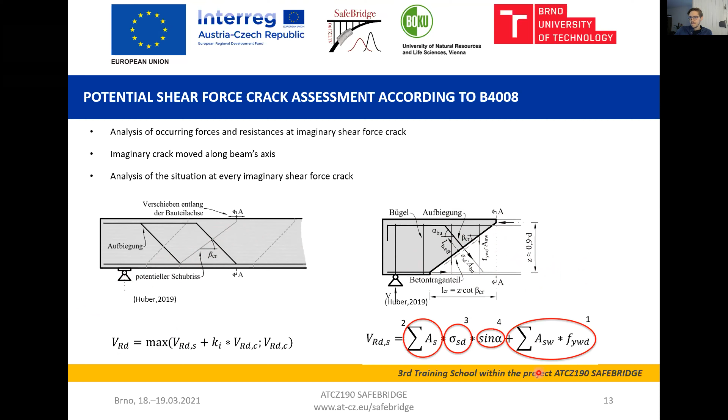In this approach, the structure is divided by shear cracks, and the vertical forces along the potential shear crack are calculated. This potential shear crack is moved along the beam, from step to step. Some assumptions were made, like beta critical with minimum stirrup reinforcement was 36 degrees. If there's no minimum stirrup reinforcement, you have to take it into account with 45.

The calculation first was of the internal lever arm and the critical crack length. The shear crack is calculated with the capacity of the steel and the capacity of the concrete without reinforcement, but we had to assume ki, a factor for the steel used, is 0, because the steel is from 1957 and has a bad bond.

This potential shear crack assessment takes time. It's not as easily applicable as the Eurocode, so it takes some steps. First, you have the potential shear crack shown on the slide before. You take the sum of the stirrup reinforcement and multiply it with the design value of the yield strength of the steel. Then you take the sum of the bent longitudinal reinforcement and multiply it with sigma SD, and you have to check if the actual anchorage length of the reinforcement is greater than the necessary length. If not, you have to lower the value.

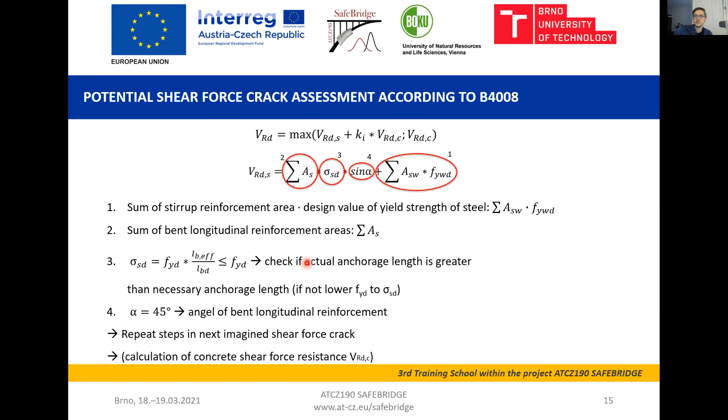Then all these steps have to be repeated for the next potential shear force crack. For this bridge, it was done in the first field around bearing G, and because the bridge is symmetrical, it's the same at bearing J.

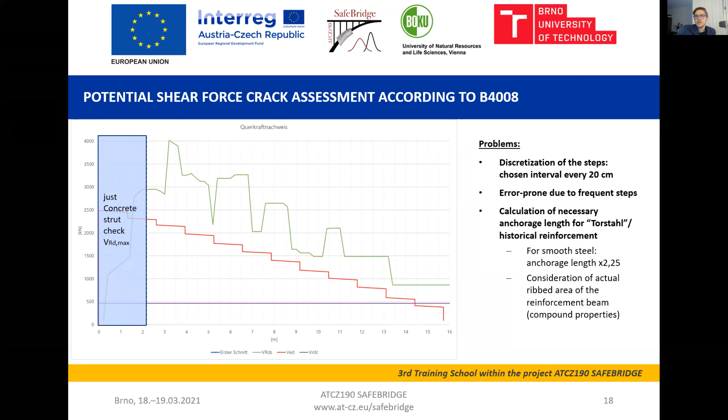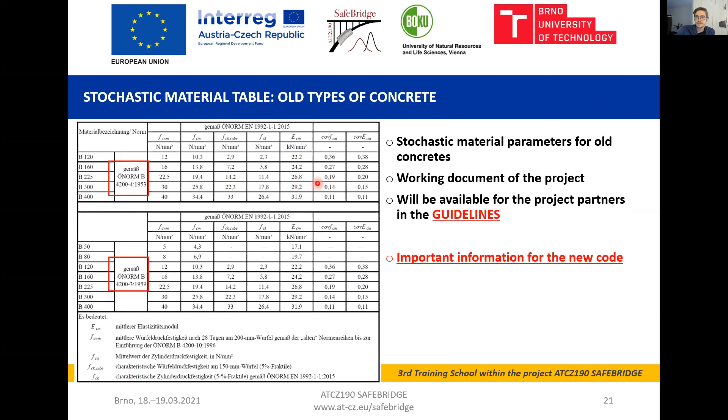For this bridge, we have concrete B300 from 1954 and steel is St 40. You can see the values and the coefficients of variation. The design load we derived from the linear analysis LM1. The value we get from the linear analysis is a characteristic value. Then, assuming a CoV of 0.25, we can calculate our mean value. And according to Eurocode 0, we take beta target with 3.8, and alpha S with minus 0.7. We can calculate our design load.

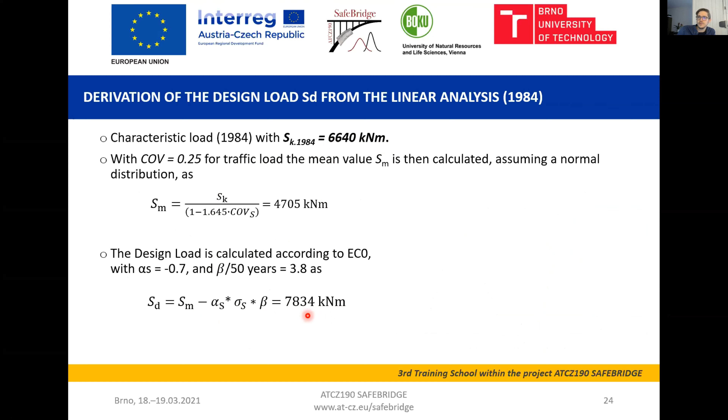This can also be done for other load cases, like the bridge was recalculated in 1984. And we can also get the design load from 1984, which would be around 7,834 kilonewton meter. The overview of safety concepts and safety formats we used for the assessment: we used the probabilistic assessment, the ECOV assessment, the global resistance factor and the partial safety factor, and also the global safety factor method.

Here the results. We calculated according to the global resistance factor method, the ECOV method, the global safety factor method, the partial factor method, and the probabilistic method. And you can see we are higher. Here the dotted line is the design load from 1984, and we always met the target with the probabilistic approaches and the other safety formats.

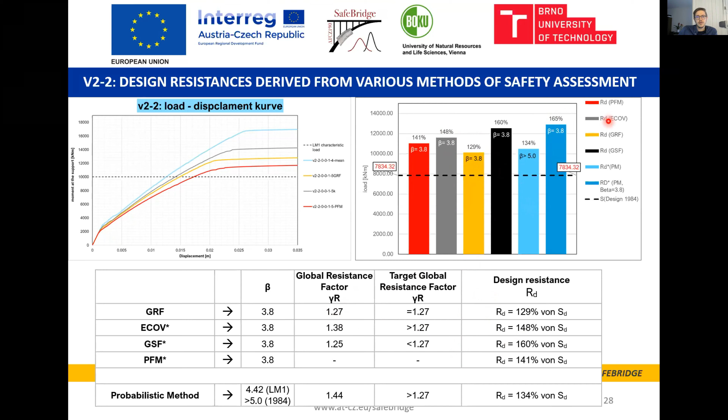The same was done for the other models. This was the model which performed the worst because it was one of the smallest models. The bigger models always assumed higher possible loads. You can again see the load displacement curves from the 30 samples and the delta displacement. You can see where the first cracks are initiated. And that's something my colleague Matthias Riegler is going to talk about, how you can assume a point of failure criterion.

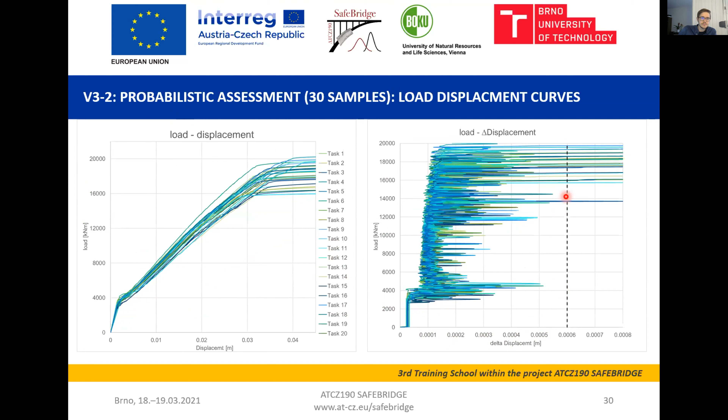And again, here are the results of the assessment. Our design resistance is always higher than the design load from 1984.

Yeah, this was it from my side. Are there any questions, or should we continue with the next example?

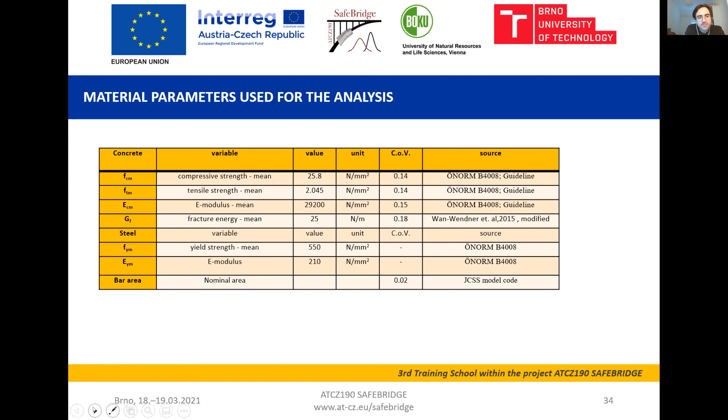Okay, so our assessment strategy for this model, as Fabian has shown before, was to start with a fast but simple linear model, which corresponds to current engineering practice. So we can quickly evaluate a large amount of different load cases to find the envelope of the most critical loads or actions. Based on the information of where the most critical areas lie and how the most critical loading looks, we used this information to construct a detailed but much smaller nonlinear model in ATENA, because modeling the entire bridge in a very detailed ATENA model for a SARA assessment is not feasible from a computation time perspective.

So we make an initial ATENA model and evaluate this model basically to find the most efficient way to accurately model the detail for the SARA analysis. So looking at mesh sizes and overall boundary conditions, etc. Based on information gained from this first model, we can then move on to a SARA analysis as well as other safety assessment methods.

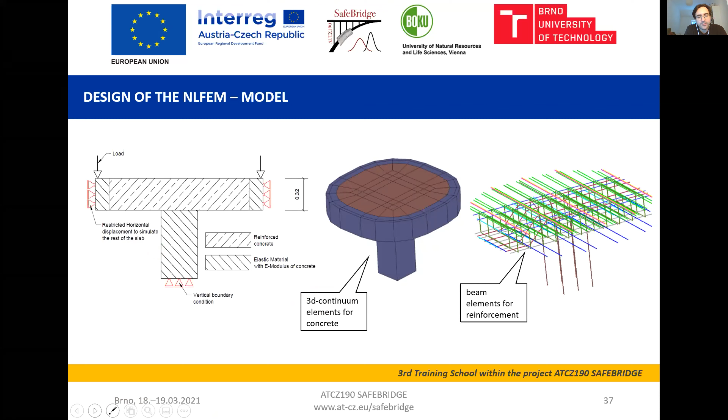Okay, so on the left we can see also that's where the forces come from. This is from the linear initial assessment. We can see on the one hand eccentric loading from the envelope, and we can see also the overall forces. These were adapted to have the same kind of eccentric loading on the detailed model.

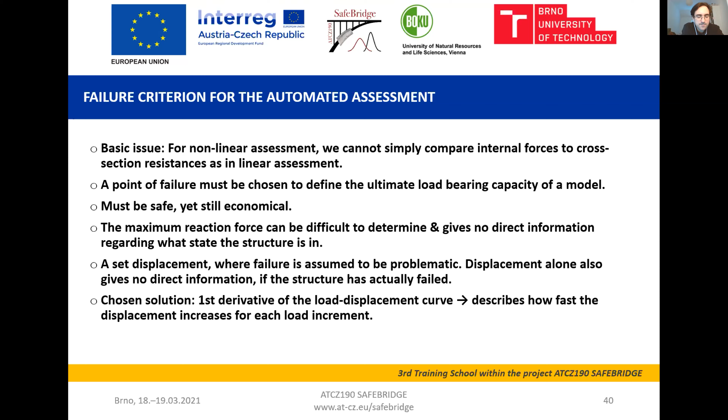So the problem here is that we have to be a bit on the unsafe side because we can't go much lower, because if we go too low, then the initial displacement will be identified as failure, which gives us very unrealistically low strength.

The solution that was found was to basically set a safe region where the structure is assumed to be intact, but failure cannot be identified. So we cut this off the curve to be analyzed, and then we can go for a much lower, and consequently safer, assumption for a critical first derivative.

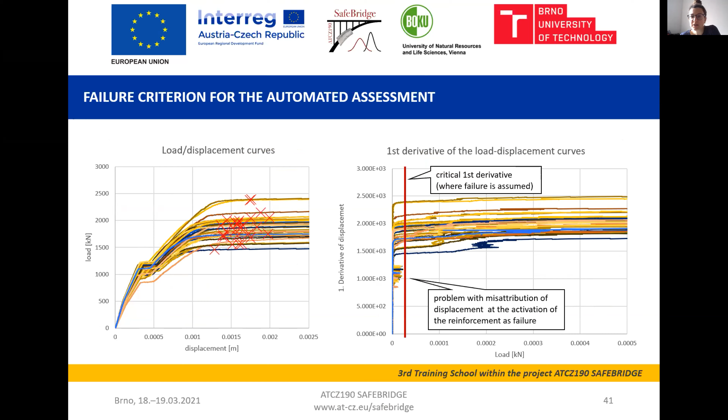At this part where the initial jump is just cut off, so you don't have this - you don't get this force. I see, so this right part, you can see here's nothing, and here are these initial jumps, and these are just cut. Yeah, discarded. Yeah, good, really interesting. Thank you very much. Does anybody else want to ask something now?

Maybe I have a comment when I see this first derivative - I'm just thinking, how did you proceed with the calculation of the first derivative? Did you use just directly the points from the computational model, the LD curves, or did you use some spline approximation? Yeah, I exported the values from the monitors to Excel and then calculated it from there. It's always basically one point minus the previous point divided by the load increment.

So how much does the displacement change for each load increment? Okay, so you use the same grid like in the computational model. Okay, thank you. Yeah.